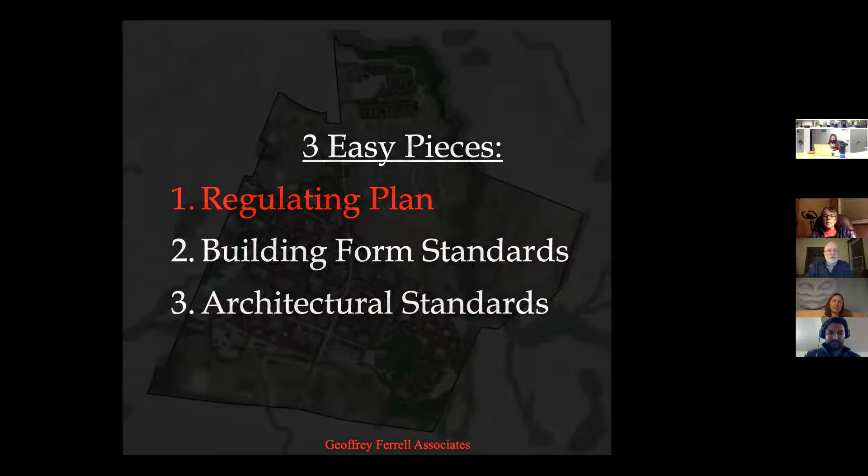Those places - now we're doing the regulating plan. It's like a super 21st century zoning map. The Taft Corners regulating plan is based on the vision plan, which is an illustration of things that could be. And there's our regulating plan, really tied to that public effort.

Now, about the border - the town, the school, and a bit of the neighborhood - we have taken that out of the Taft Corners form-based code because there's just no idea about changing any of that. It's going to be adjacent to and take advantage of it, but it's not really part of the form-based code. Doesn't make sense to form-based code that area.

Also, the area down at the bottom, which I don't know the official name of, I've been calling it the auto-centric and big box area. In the future, for who knows how long, there's going to be a need for that kind of stuff, and it's already down there. The Home Depot and the Walmart apparently are doing well.

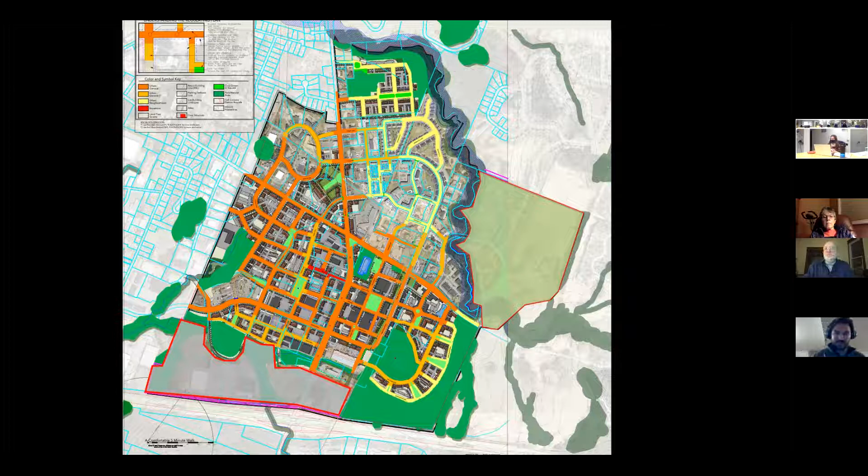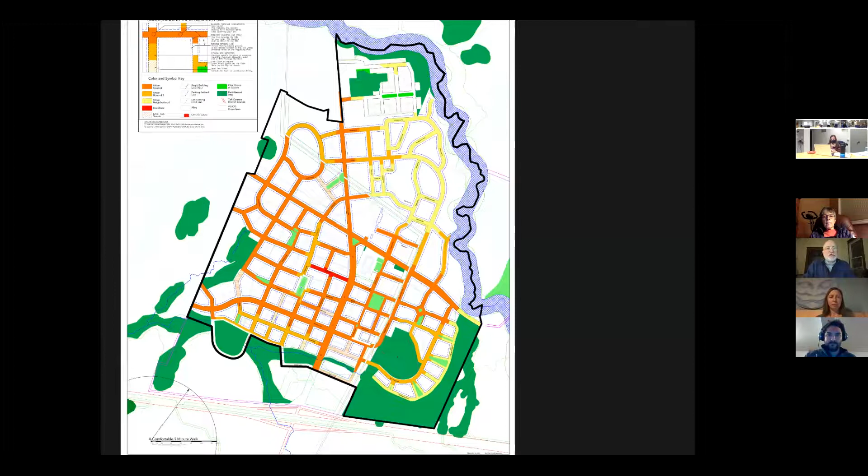So here's the regulating plan as it stands today. By the way, I've set this up mainly - I'm not really talking about the build-to line or the RBLs, but what we're looking at in terms of public open space. I think this is something I've heard a lot of conversation about, since actually just before we started, so there's no excuse for not getting it right.

I applied a bunch of 650-foot radius circles. It's like if you were in the middle of this, in one of these greens, how far away you could get in 2.5 minutes, or how long it would take you if you lived in that radius to get there - showing what we've got and how I think we've got the place really well covered. So the idea is if you live here in the future, you're going to be able to walk to one of these civic greens.

Now, this is not dealing with the parks and natural areas - those are in addition to this. But within about a 2.5 minute walk at most, with some exceptions, you're going to be able to get to one of those open spaces - a little park with street trees around it, where you can do whatever, throw the frisbee, eat lunch.

And one got added since the first regulating plan. We added this one down here because there's a bit of a desert down there south of Maple Tree Place. Right now it's a desert of asphalt with parking lots, but we added a green there, looking to fill that hole. Basically, I found a block down there in the regulating plan that was just an easy thing to do.

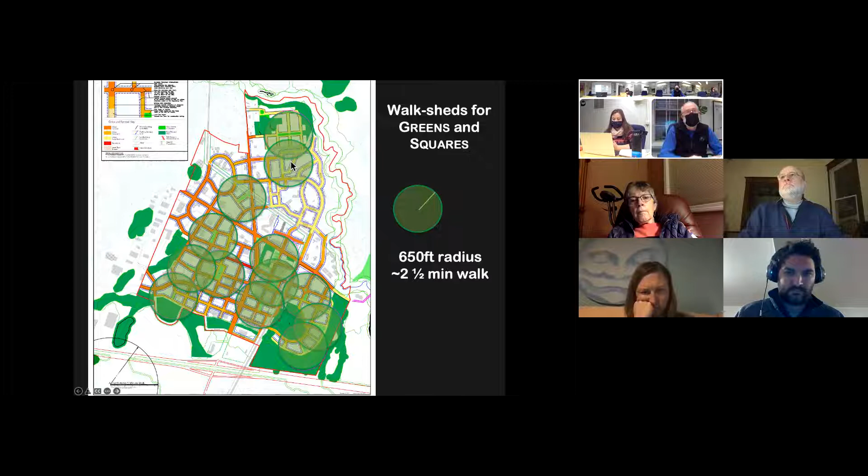Really? Do they have a pool there or just a little playground? I believe they also have a pool.

It would be possible to add the green that's going in by the hotel and the restaurant as desirable as a public green, because that's in the commercial part of Finney, whereas some of the other ones, like in the whole yellow loop of Zephyr, there's a lot of green spaces, but they're essentially the backyard to the townhomes, or the apartment buildings. It's kind of a different animal than it shows here.

But Emily, you'll have to enlighten me after the meeting of what's missing down here.

So on the Peter Judge property, which is right on the northeast corner of Taft Corner, that's old one-story development. And we have a road going across the northern end, a new road connecting right through there. Yeah, that connection is definitely new. And there's some green right around there, especially under the power lines, and there's even a small gazebo on somebody's property.

But I was really surprised we didn't say in the long term we want a public park there because we lack green space in that area. And it's not built, except for some of it would be parking lot. And if that shopping center were ever redone, wouldn't we want it redone according to this code? And if so, why don't we show grids through there?

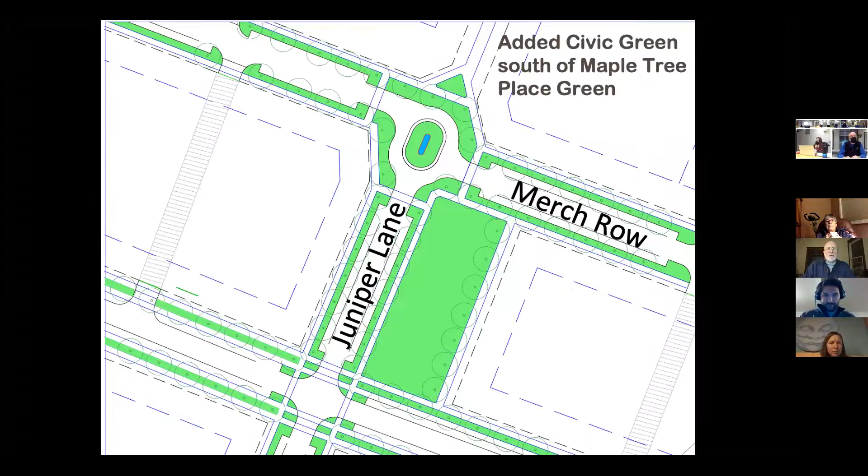I have two more quick things to show that I think will help illuminate the discussion later. One is a brief discussion about why we put urban general where we did, and urban general 2 where it is. The one big difference: urban general is taller, urban general 2 is one story lower, and it also does not give retail as an option.

So any of the orange you see here, someone, if they wanted to try and put a store in it, they could. We wouldn't encourage them to, because the United States has way too much retail already. But the logic was - pardon my scribble, these are lines drawn with a thumb ball, so it's a little ugly - these are the streets that are kind of busier, carry more traffic. They include all the framework streets, and this street also has the bike lane, the cycle track on it, as does Zephyr. But these are kind of the bigger, busier streets.

We did not want to take away the retail option from those and force them to be residential or office only. So there's some logic to having those a little bit more able to respond to the market where they have a higher level of traffic or busyness. Then in here and around Trader Lane Green, have that be residential - well, it could be office, but I think the reality is, 99% accuracy, it'll be residential buildings there, most of them will be. So that's part of the logic of what is orange versus I'll call it melon.

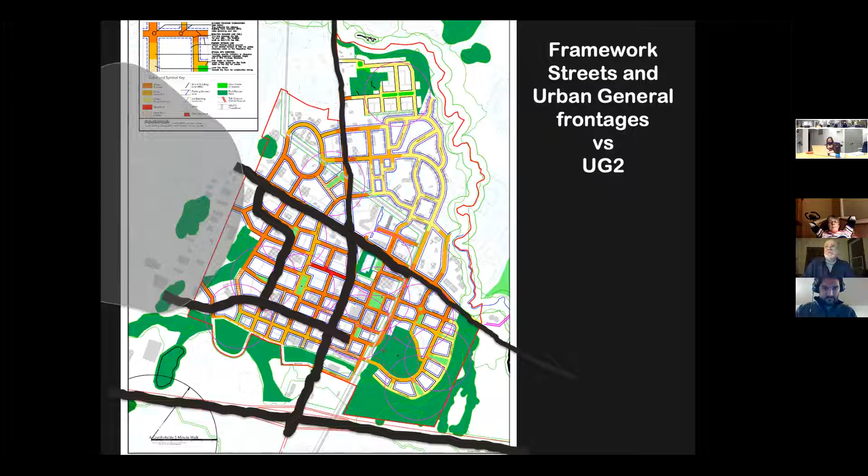So that's kind of that logic. And then I think I have a final slide just showing - the presence of the kind of industrial area over between Taft Corners and the airport made sense for the orange and not the melon color. And then the disposition of streets here, now the colors are completely different. But we did talk about those earlier, so I don't want to take up any more time with that.

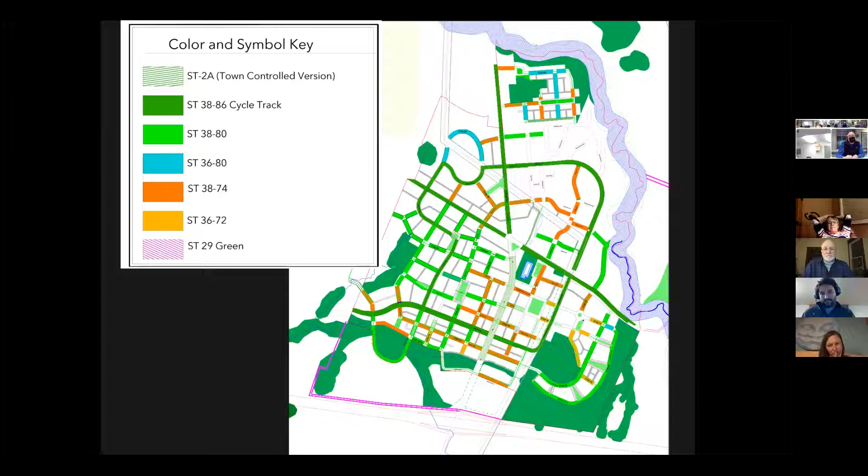I have one general comment about all the street specification things, and that is, I still want more space between the front of the building and the sidewalk. Whether it's for a shop front to have tables outside without people having to walk around them on the sidewalk, or whether it's residential, just to have a little bit of a green area where somebody's dog can poop - hopefully picked up - or plant a garden or a flower bed. I don't like the feeling of being a pedestrian between a curb and a tall building. I put it in the comments, there's only one of these that I felt wasn't an issue.

Because there's such a wide tree green, I felt like it'd have this feeling of space out there. But on all the others, it feels to me like the front yard, quote unquote, isn't a yard. It's just 7 feet, I think. Is that right? Yeah, it's 7 feet, and it doesn't feel like enough to me.

And I realize this is a cultural thing probably. And I wanted to ask, were some of the street cross sections made a little wider based on input from the planning commission? Okay, yes, that is how we got here.

I really appreciate that, because it does feel to me like most of the space is good. It's just that last 7 feet to the front of the building feels to me like still too close on most of them, especially on ones like here where it's paved, because you might have shops on the first floor. It feels like if somebody wanted to set up some tables out in front of their shop, they're going to be into the sidewalk very quickly.

Actually, they can't be in the sidewalk. They have, what I meant to say is their dooryard, right? Their dooryard's only 5 feet, so you can't really do anything out there. Oh, that's actually a pretty typical area for sidewalk cafes. That's a generous area, I think, for it, it's just a different environment. I know if you go back to Victor Dover's video, the YouTube presentation about streets...

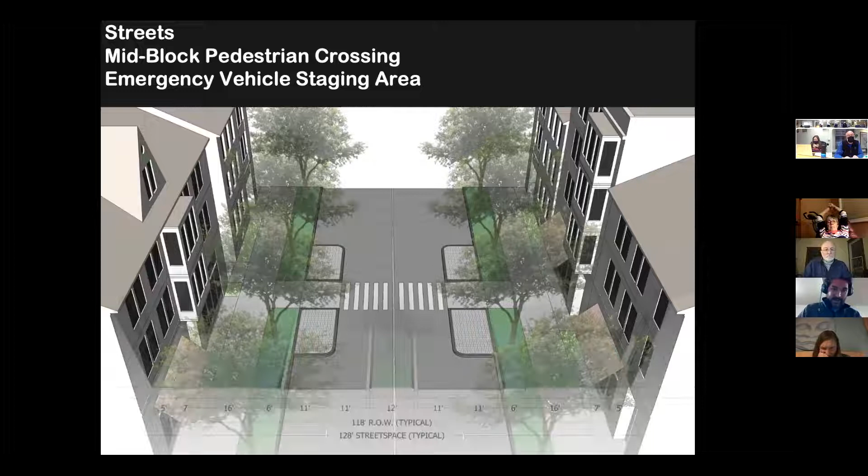I'll give you a very tactical answer. You know, if we're trying to expediently pass this bylaw, and Jeff's got to change the whole regulating plan to account for a couple more feet on each side, we're not gonna meet the deadlines we've set. I mean, that's just reality.

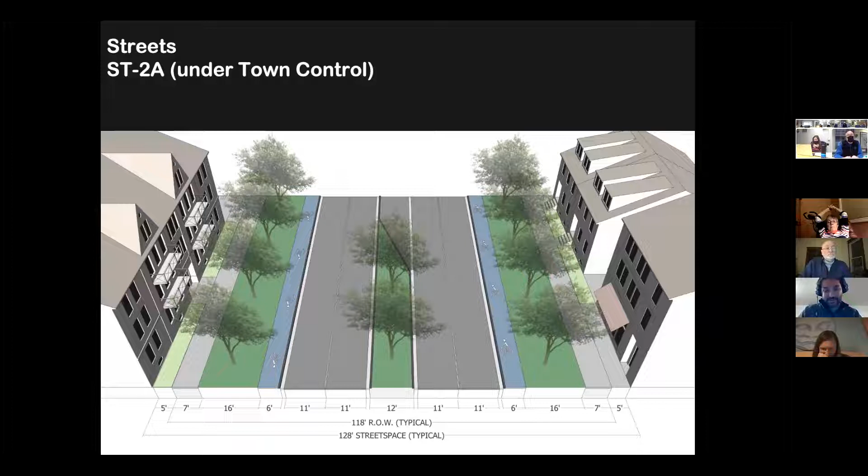We can add another foot or two if you think you need to, but it's going to slow us down. But what I would say about that is I don't want to slow things down, because I feel like the overall goal of getting this in place trumps the other goals. We've got a lot of good.

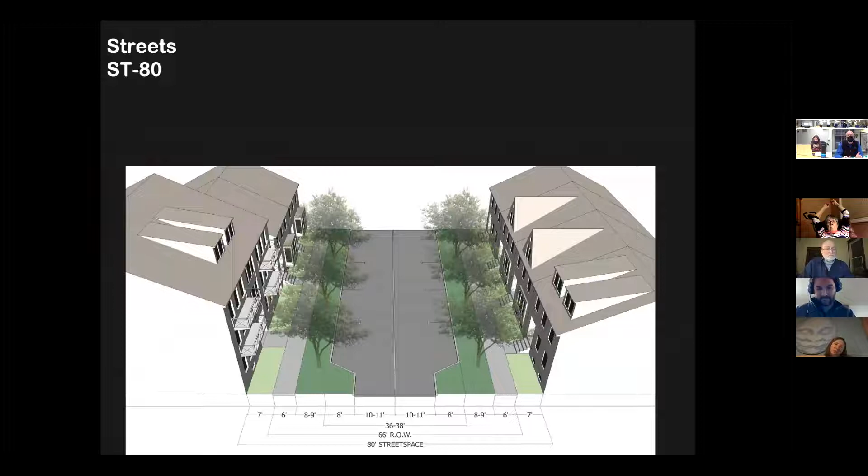We don't want to sacrifice the good for the perfect, but we also are saying we want to go and we will be revising. And so to me, this is a list of issues to resolve. After adopting this, before anything is actually built, we can still be working on it, but we have to at least have it in place. So I'm supportive of moving forward.

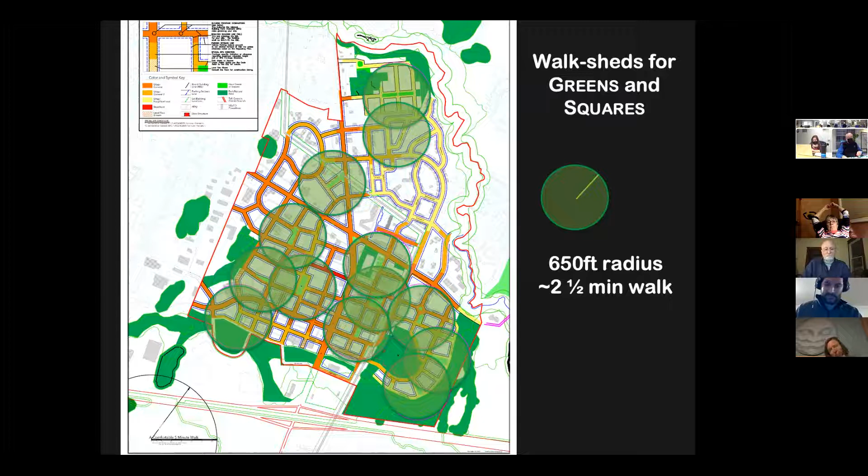And I appreciate that pragmatism, Chapin, and if that's something that's very desirable for the PC to add a couple more feet, let's have that conversation in the future. I'm fine doing that.

Thanks. I normally agree with absolutely everything Chapin says, but I think I need to go stand in a couple of street spaces and try to feel that, because my one concern is that side to side it just starts to feel very... you still want to be able to feel like you're on a cohesive street, and I don't want the buildings to be so far apart. There's some streets like that in Washington, DC, where the street is so wide and so big that it feels less like you're in a place where you can easily walk back and forth and around.

Sounds like a DC resident wants to talk. That's what, yeah. Well, yeah. And second.

Chapin, what you're talking about sounds like you really like the village. No, I don't. And the point is that's a hugely different environment. I would say, with my tongue in my cheek, we don't want to compete with that. No, I totally agree, and I also realize it's a cultural issue of where I grew up and where I've lived, and how I react to what's happening in Winooski and Essex Junction.

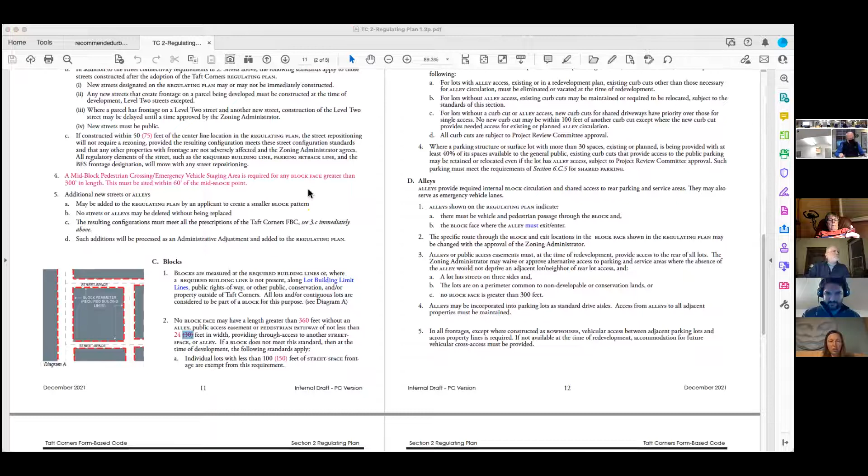All right, I was on mute. I had a question, which was on page 71. Just wanted to know why this bicycle racks item was in pink.

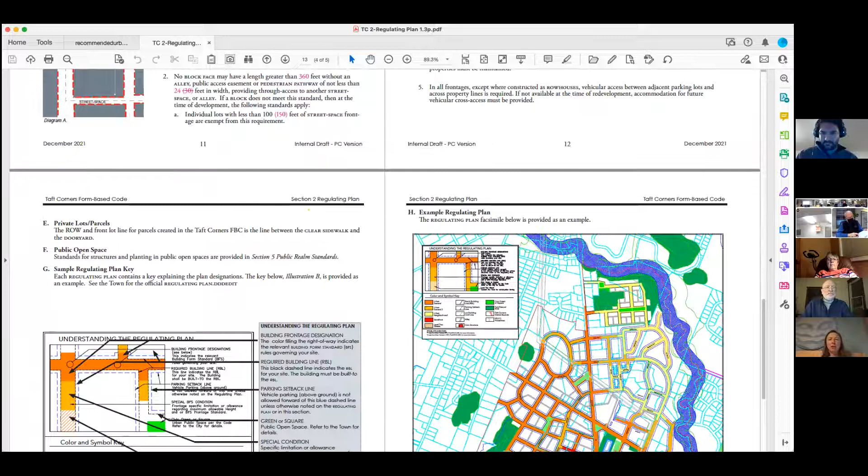No, in the public realm standards. Oh, sorry, am I not in the right place? That's okay. If it's in pink, it's because I can answer that. It's a recent change, and it should be, unless I screwed up, which I do sometimes. If you look at the one version back, that language was different or wasn't there. Thank you. Sorry, wrong tab, I'll go to my other tab with my other comments.

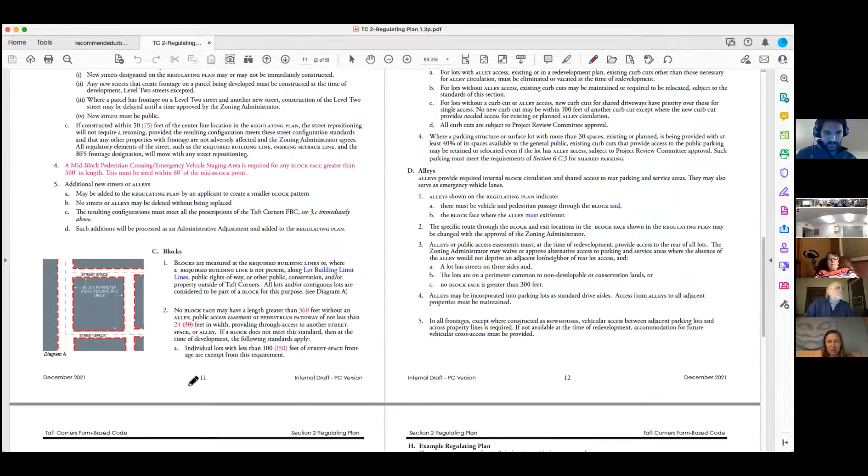Yeah, we're in the section regulating plan, section 2, sorry. Excuse me, I've only raised my hand because, Jeff, on page 11, I just want to make sure we're consistent. If you go up a little bit, very top there under 2E, that 100 feet, let's make sure we're consistent with what's in section 5. I'm not sure if we said 150 there. Okay, I just want to make sure we're consistent there.

Yeah, this is one of those areas where I'm putting entire trust in you professionals. Well, and the 100 feet, the point is not to have cars too close together coming out into a new direction. The engineers like to talk about points of conflict. So I totally get it, this is largely a traffic engineer's question. And I understand why it's there, I just don't have any opinion about what it should be, because I trust you guys.

We will double check, did not have comments on this one. I'm sorry, I was in my other tab. That's good, Shayla.

Jeff, did I say anything in the comments that you wanted to bring up on this one? When I filled out the survey, and apparently Jill did too. I haven't seen that yet. Matt or Emily have that? This was in the survey, Jason. Yeah, I did answer, I didn't break down my answers.

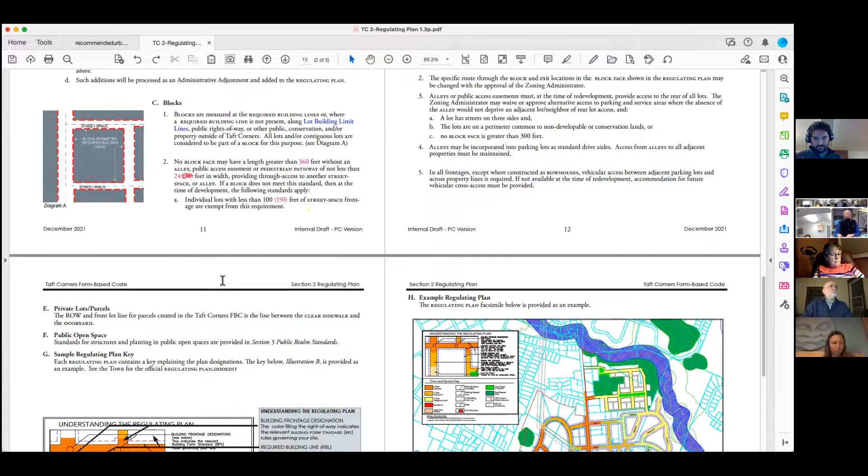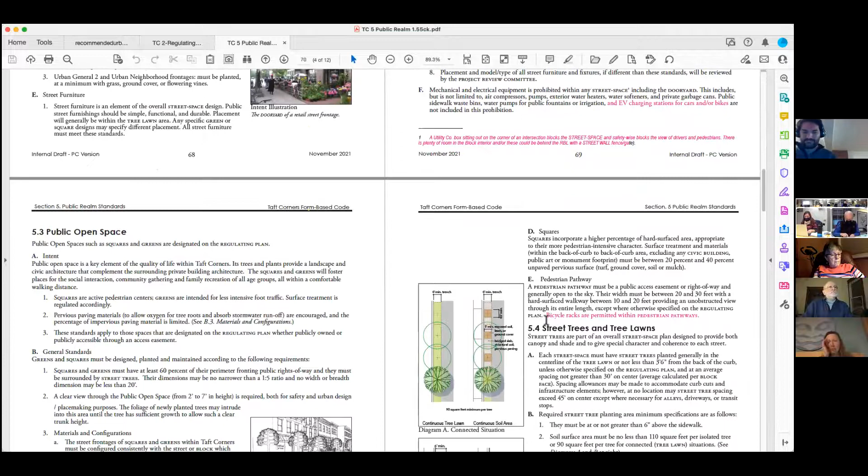So then should we move on to the public realm, which we actually had mostly done before? Yes, I was thinking we had done it, but I can get to it. Section 5. I did save my responses on this one, so I can look at that. The idea was to give folks public realm as a follow-up survey, and the regulating plan was a lead-in survey to tonight. Good. And I put the question about stormwater, which we dealt with already.

I can point out a couple of, I'll call them Chapins. On the street trees, Chapin sent a lot of information, and I fired back an email saying basically, great, somebody else who's as committed to street trees as I am, and we're really on the same page. But I have to say, Chapin, you did tweak a couple of changes that are just improvements, and I'm not finished with the trees, but Acer rubrum is here. Yeah, we both had red maple.

Also number 2 in this is adding a line about species diversity. It's a simple and pretty well accepted rule, and I totally agree with it. As things are built, you don't want to have too many of one species, and this says too many is 21%. So if you've used up all of your red maple allocation, then you go to another tree, so that you don't end up with a bunch of Dutch elms covering the whole place, which nobody's that crazy anymore.

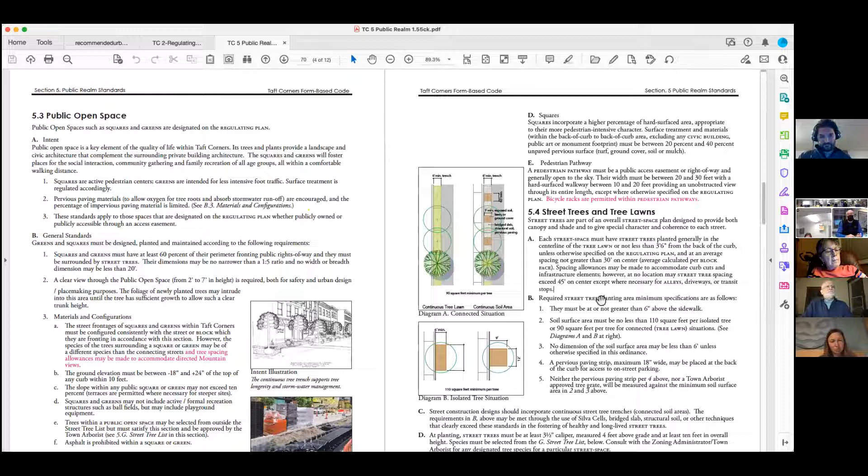And we're all agreed: no invasives, emphasize natives. There was a 2007 review of our street trees where we hired a consultant, and they recommended we have a tree board to advise on these things. From the things they recommended about pruning trees, I could see that we need an arborist. So I think that's a branch off of this for us to consider. A number of those recommendations are already in this document, but just some of them. There are also a couple of things here trying to make it more clear that this list is just for the street trees, other trees are handled elsewhere — that's responding to a concern of Megan's.

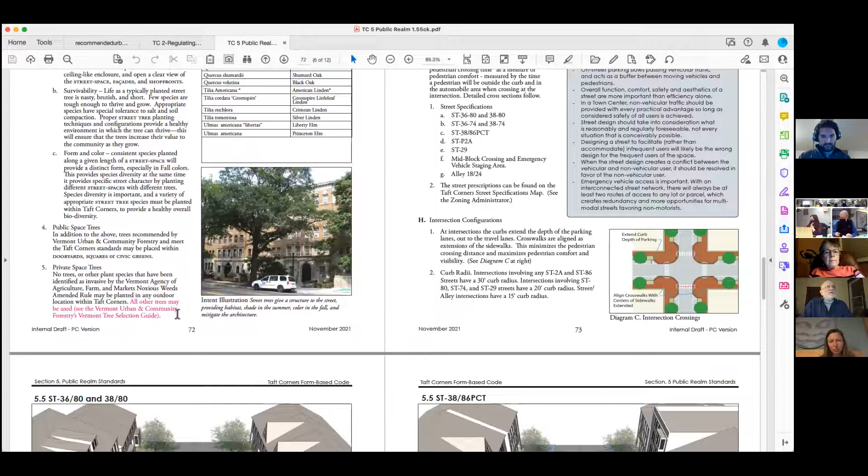So one of my issues was on the new map at the end of this section, that has street types — there are 3 green colors, and they don't differentiate on the printout well enough for me. Oh yeah, our printout came out horribly. And the other thing is it's hard to pick out where our bicycle routes are, and this is only the streets — pardon me for saying that streets and cars are the same thing, because they're not, but okay, we'll redo that. I do want to stress the streets map is really intended to be part of just the town's implementing document, it's not really a code issue.

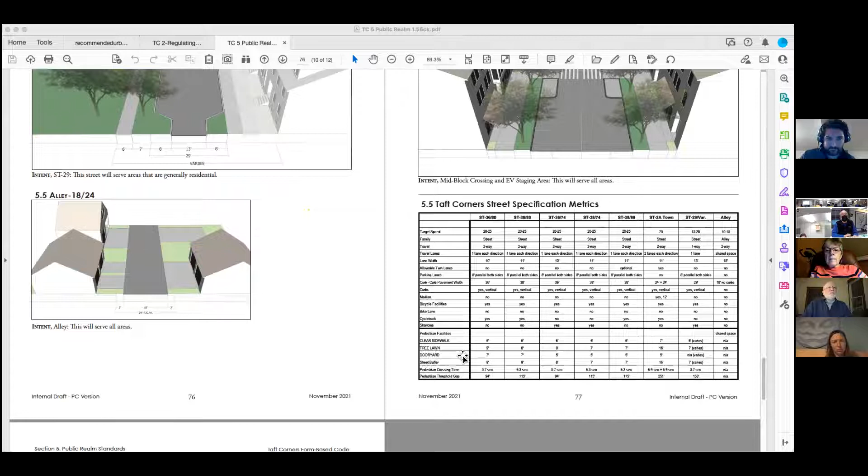I'll also make sure the colors are clearer. It raises the question for me, like, we say there's going to be a cycle track on Zephyr Road, but that's not going to happen for decades in my opinion. So do we just say bicycles can take the lane on Zephyr Road, or do we say they can take the lane anywhere? On the chart, just below cycle track is Sharrows, and I noticed we have Sharrows on everything except an alley if it's not a cycle track, so it looks like you're allowing for bike lanes that way. I wondered about that Sharrows line, just above the horizontal dark line, just below cycle track, in the table on the lower right, below cycle track, above pedestrian facilities. Yeah, there you go.

So if you look at cycle track and sharrows rows, which are two-thirds of the way down right there, those two rows, there's a yes in every column except the last one on alleys, in one or the other. And it looked to me like you're allowing for bicycles to be able to use all the streets. And when they're not on a cycle track, they would have some kind of sharrows painted in the road where they would go, I assume.

Well, it would, yes, but bicycles by law can take up any lane except freeways. So what wasn't clear to me was, is there going to be a bike lane within the travel area, or could bikes just take the lane? And if so, if they can just take the lane, why do we have sharrows? Can you explain a little bit about that?

Well, I see that as kind of the same thing. A sharrow is painted, trying to give some warning to the motorists that they should work with the bikes. Chapin, I'm not sure I totally follow what your question is.

Is part of your question answered by the bike lane row there in terms of no across the board? I mean, really what Rick Chellman, our consultant, has — here's an issue. Let me give an example. Let's take Zephyr Road. It is not going to be rebuilt with a cycle track.

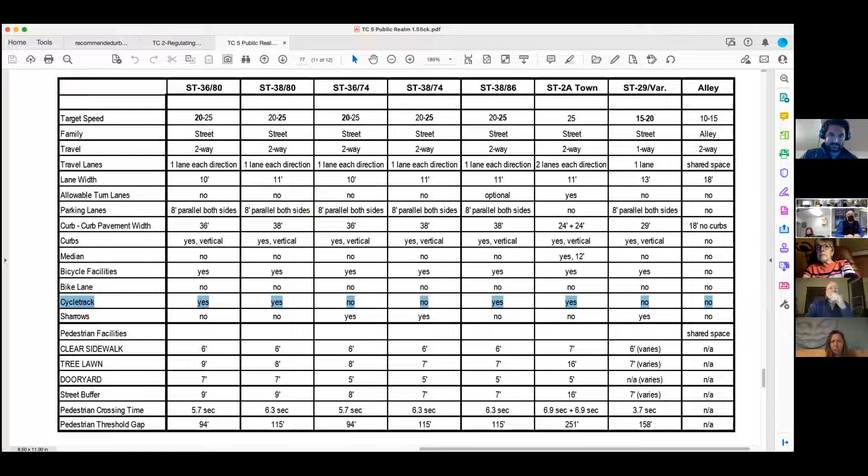I mean, yeah, we can say that. I don't know, but it's helping me to hear this conversation. Thanks. If I could jump in, my understanding was, and I'm thinking I saw this map, and that's part of the reason we have the cycle track street section going around Zephyr, but that was already designated as a cycle track or bike route, and that map is already out there. So it's kind of a live issue with reality and what town policy is.

A second point: one difference to a bicyclist between the 86-foot street space and the 74-foot street space is that it's all built and planted with trees. Let's give them a couple of years to grow. In that situation, people will naturally drive slower—the visual friction will tamp them down—so bicyclists will be more comfortable because of that slower speed.

Actually, I have a suggestion: either drop the row that says sharrows or include an example of a sharrow on one of the preceding diagrams. Because when I saw sharrows, I didn't know whether it meant take the lane or there's going to be a bike lane painted onto the existing. Oh no, a sharrow—we don't have it as a defined term, but it's commonly understood as take the lane, this is a shared... I think it might even be shared right of way, but that may be too cute. Actually that's what it is. Yeah, perfect, then we're fine.

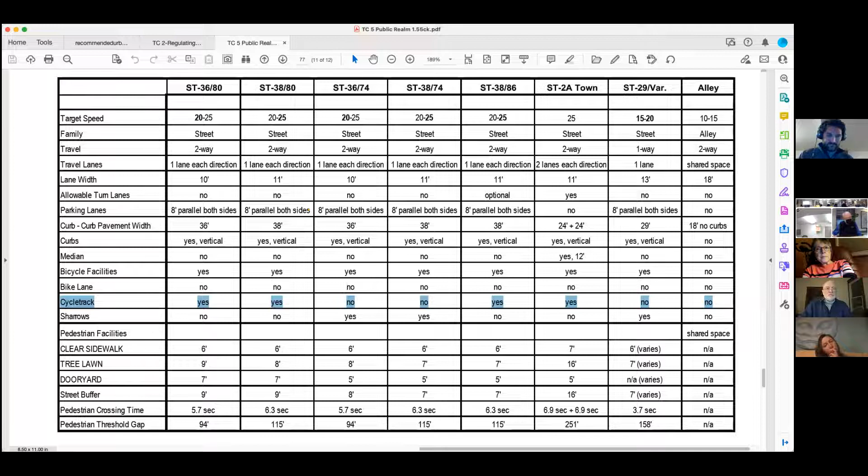On the diagram just to the left of that one on page 76, my comment was just, let's show solar canopies and rooftop solar somewhere in the sketches. Because we show balconies sometimes and awnings sometimes, but we don't ever show solar.

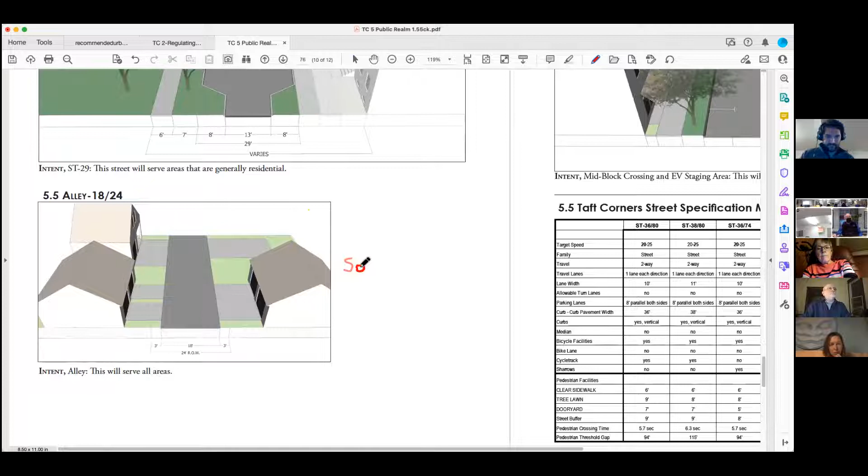I will speak to our sketch, and I don't want to slow anything up. We should be able to—I'll see if we can get some of those on. And you probably saw I emailed you pictures of solar canopies over parking lots, in Berlin and in two other states. I was just looking at that hours ago. I'm going to look for a place to drop one of those in with a caption specifying it as surface parking incorporating solar. Perfect.

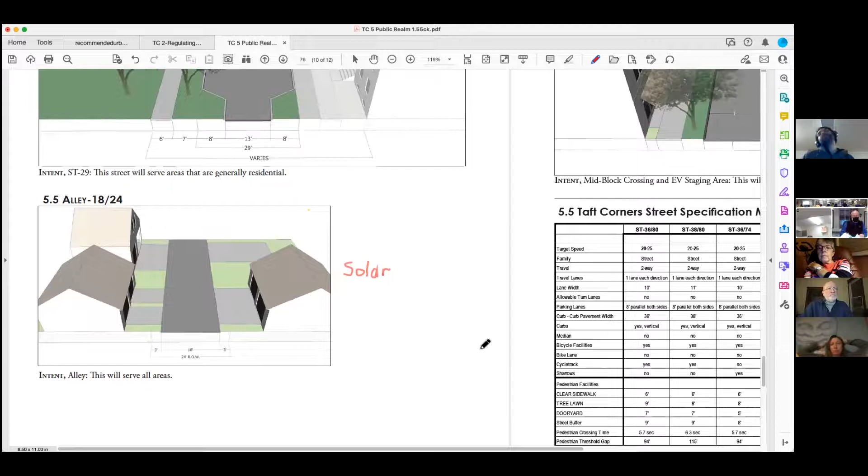Shayla, did you have questions on section 5? No? Okay, no, I had that one that I asked at the wrong time.

Good. I am incredibly excited about this project for a number of reasons. One of them is how green these streets are going to be, because these trees, unless you plant them in marbles or asphalt, are going to really thrive and take over, increasing the real estate value every year—which is not what I care about as much as the beauty. But it is also very Vermont, we talked about this before, but it does make it feel—gives it a more Vermont, slightly more rural feel, which is nice, especially on the maple streets, although sorry for the cliche.

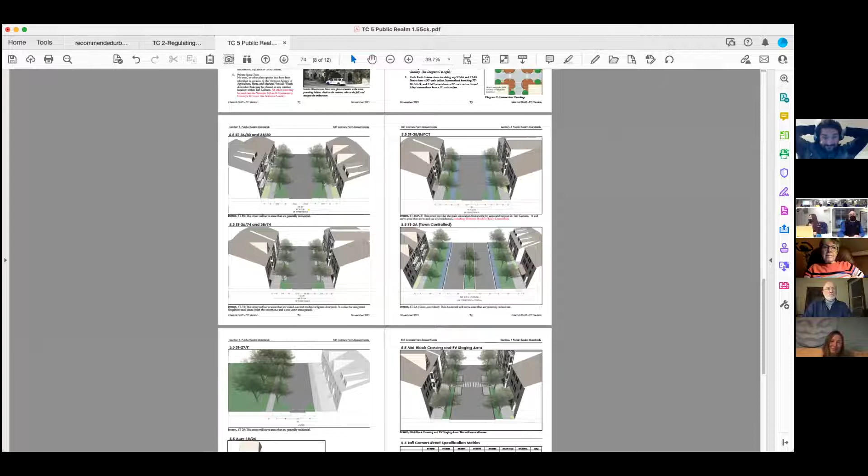Well, we know we have to plant sycamores on Sycamore Street, right. I agree. All right, I have some other comments I filled out in the survey, but I don't think we need to talk about them as a group. I've said all the main points that I would bring up in discussion.

So I guess my question is to staff and to the Planning Commission: we don't have a quorum tonight, and we have an aggressive timeline. Do we really have a choice other than bringing section 2 back up at our next meeting?

My thought is, if I can get a head nod to get a hearing warning in the door, that leaves most of January 18th for just a more global, wrap-up conversation. Issue spotting, we can't change the hearing draft at that point, but we can start taking notes on what might start happening as we get our list together for the hearing.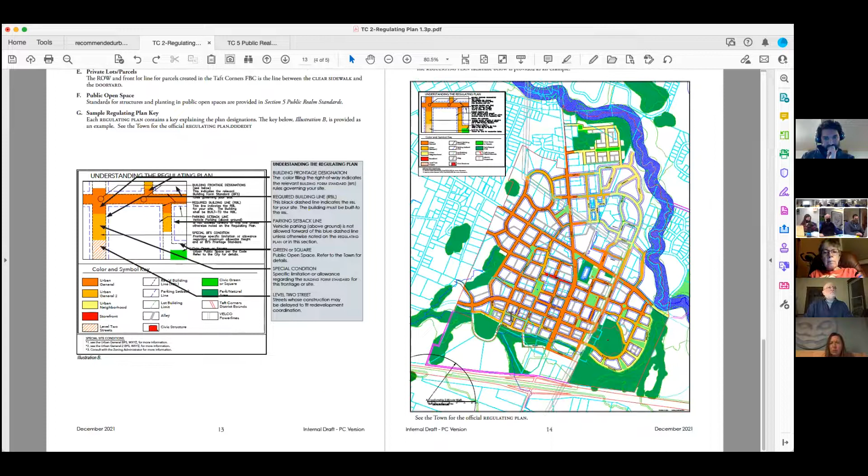And to me, it depends partly, we can't do it tonight because it depends partly on how the rest of the planning commission feels. But I'll say one of the two big examples is, to me, in the southwest quadrant, the Harvest Lane loop that goes down towards Walmart and Home Depot. Yeah, in the right, yep. Sorry. Thank you, you're doing a good job getting us there.

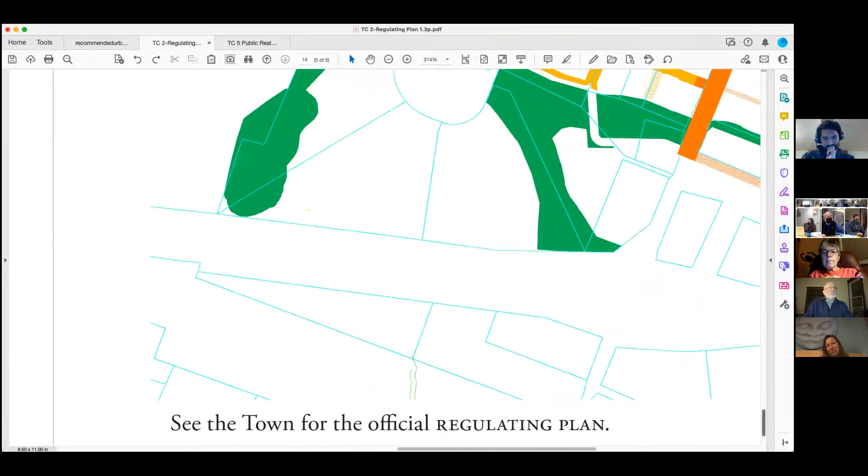So that loop, you have green for a natural park. It's interesting what it's doing, it's loading everything probably. So there is a natural park in half of what's now a single loop, and there's roads and it's residential there in the other half of that loop. So where there's that sort of curvy road on the bottom of the loop, and then the top is now the curvy road that's Marshall.

Right now, there's nothing between Marshall and that loop. It's all wild in that interior space, and it's away from anything residential right now. It's sloped to the west, relatively dry on the upland parts, and then the part that shows the park here is relatively wet. So it'd be an ideal place for an outdoor amphitheater, an ideal place for a dog park. And I would just like to see outdoor facilities in that entire loop and stop the residential grid at Harvest Lane.

So that's just a feeling to me about long-range land use. And if the rest of the planning commission doesn't feel the same, then I wouldn't say, because if we had to add more space for buildings, you might do that. But right now we haven't developed any of the stuff to the north and east of that as residential. And so the idea of making residential streets in that area that now is a natural place that was ideal for some other natural uses bothers me.

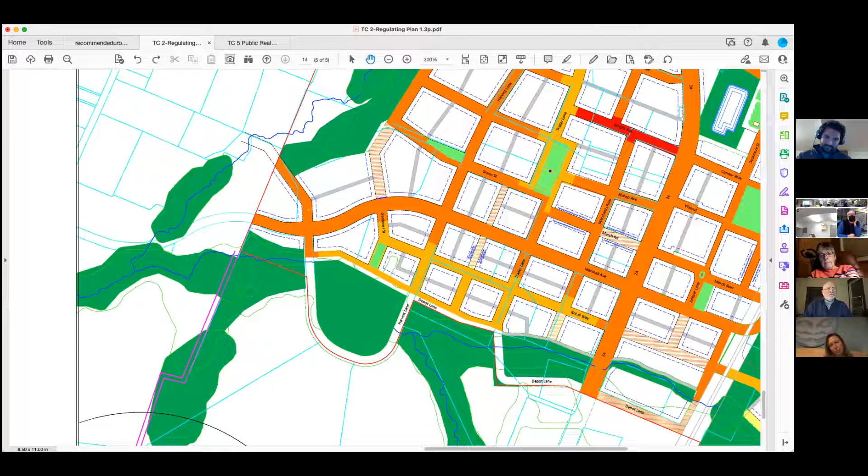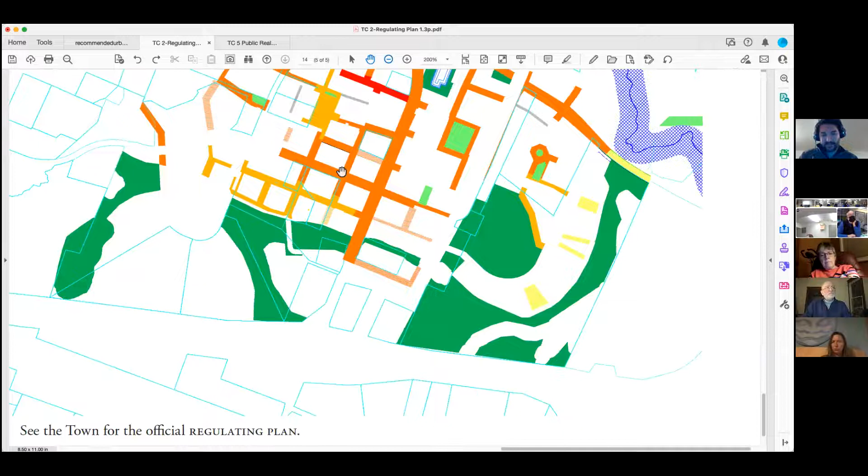I would object. I was hoping to have that conversation tonight, but we can't have that conversation tonight. I'll defer to staff, and if we want to talk about that, ideally within a 5 to 10 minute time frame next meeting, or defer that conversation to an amendment later if it proves to be more of a longer conversation.

Also, just to prep that conversation, there could be some ability to compromise here too, in terms of retaining some of the grid pattern and releasing some of it back to park space. I think anywhere the grid pattern is shown, if the town decides they want to develop an amphitheater or a dog park, because it's a municipal use, it can supersede a lot of what's in this regulating plan.

That's a really good point. And to your point, like the corner at 2 and 2A near the stormwater pond, wanting to develop that as some sort of transit center, you can waive 4413.

The select board has, I don't know where it's gonna go in the budget discussion, but Matt, isn't there like 60,000 in the next couple fiscal years for the community center study? Community center study, yes. The town's gonna be looking at all of that fairly soon.

You're reminding me that I did want to ask a question about the regulating plan. There's somewhere it says you can't build where it doesn't allow you to build. Off the top of my head, I can't tell you exactly where it says that, but it's kind of a matter of course.

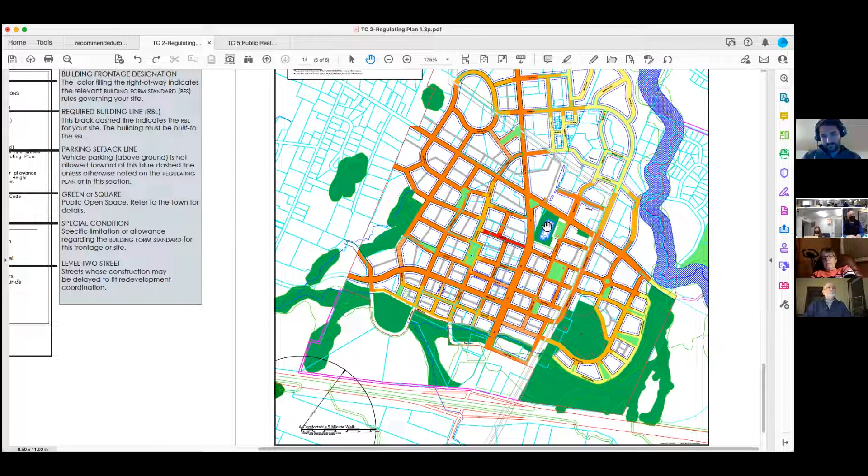Okay, and I put in my comments too, that the southeast corner of Taft Corners that includes the stormwater pond for Maple Tree Place, on the regulating plan, I wanted to reserve that entire block for civic use.

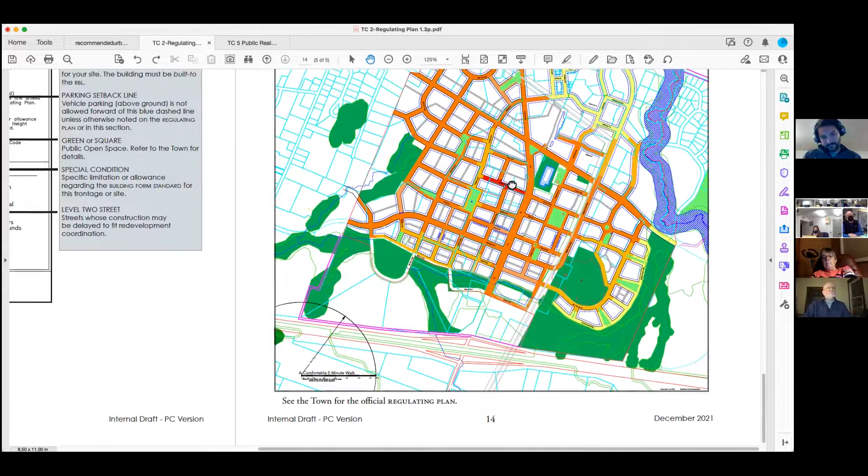Right now, you could put quite a few buildings on both the west side of the stormwater pond area and the south side. A lot of the east is reserved there as a park and a transit center. But it feels to me like if we ever had a police outpost, it should go there.

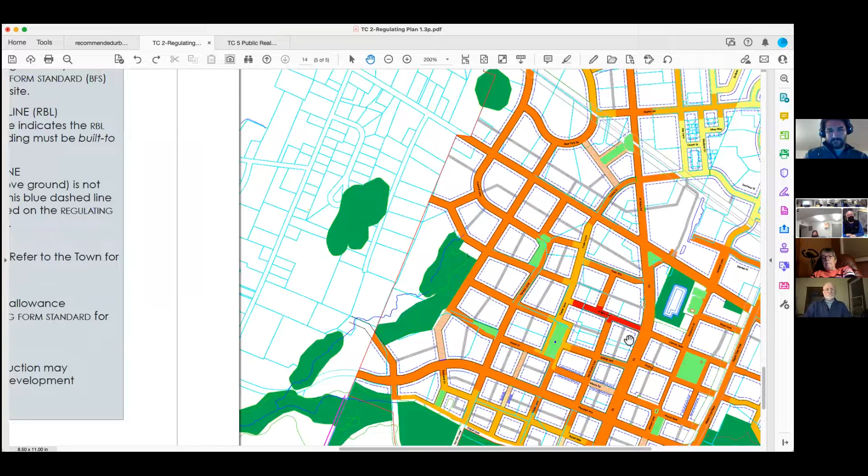I put some other examples in my comments. You want to zoom in a little farther, Jeff?

I wonder if these are things that make sense as part of the project journal memo, like when you do your community center study, these are places that we think would be good spots within the growth center to scope.

So there is that Men's Wearhouse already there just south of that pond, but there's nothing on the southeast corner of that whole block. And I would rather leave it that way. In fact, the town owns some of that.

I just make the point about scale. If you reserve all of that for civic green, then that's where you'd put all the municipal stuff for the island of Manhattan or New York City. Museums, things don't take up that much room.

I could see a playground, a museum, bike rentals, all mode shift stuff, in addition to the transit center. That's not gonna take up much space, you could fit all that there.

I want to think about some measurements so that when we're talking about these things, we don't make decisions thinking that something this big is actually this big. What you see on the map as the size of the island of Manhattan or downtown Montreal is actually this. If you superimposed just a fraction of Central Park here, it would take up 3 or 4 of these blocks.

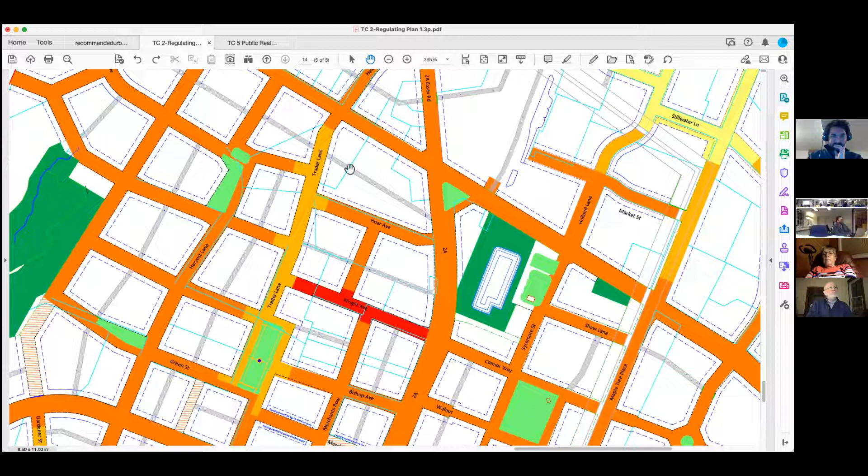I do think the other piece that is important is this idea of building more residential, more community space in this area. That doesn't exist right now at all - just housing apartments in a lot of this space, except for Finney. So I do think that's a new idea to some people, and this really reinforces that in a very different way, a very different vision.

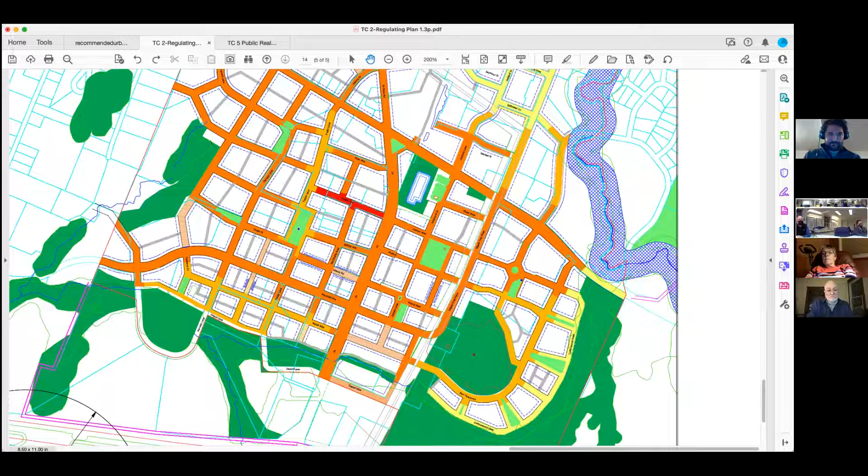Yes, and it's about living in Taft Corners, not necessarily living in some particular development. Exactly - the model has been Finney Crossing, Cottonwood Crossing, or Maple Tree Place. This is a way to pull for a cohesiveness across the whole area, that you would get to Taft Corners and say, I'm home. Yeah, make it a place.

Jeff, your comment about that being where the real market is - absolutely. It's really interesting to see, partly because I'm in Washington DC, but the advertisements that the people building high density townhouses and new apartments and condominiums use - they're advertising life within walking distance, urban living. The way they advertise it, I couldn't have imagined that 15 years ago.

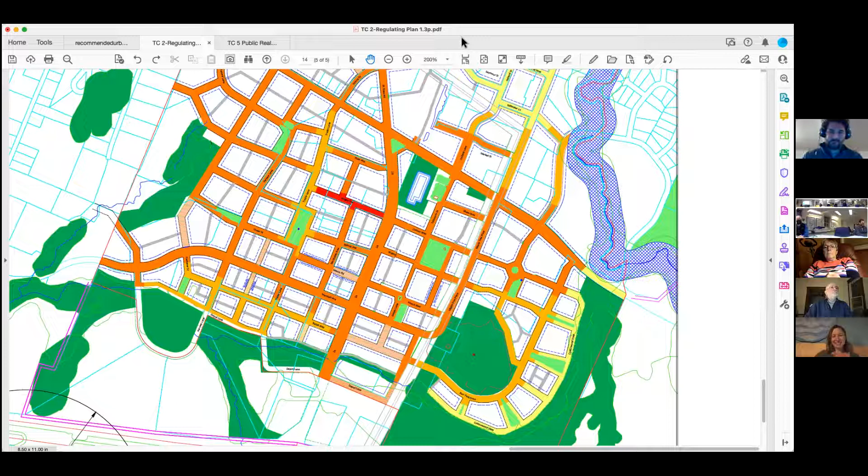Okay, I know the other thing that goes in the civic quadrant that I'm worried about is the multi-level parking garage for people who are using public transportation and attending the civic buildings, including the museum and the library and so forth. It'll have to be an elevator.

What about an elevator? If we're talking multi-story parking garage, there's going to have to be elevators, if you're worried about accessibility. They're going to have to put elevators in the parking garage. Oh, I thought they already had to. You can't get away with a parking garage without an elevator, can you? By code, you can't. We don't have any in Vermont though, do we? All the ones in Burlington have elevators. Oh, elevators for the people, not for the cars. Sorry, are you talking about cars? I was talking about people.